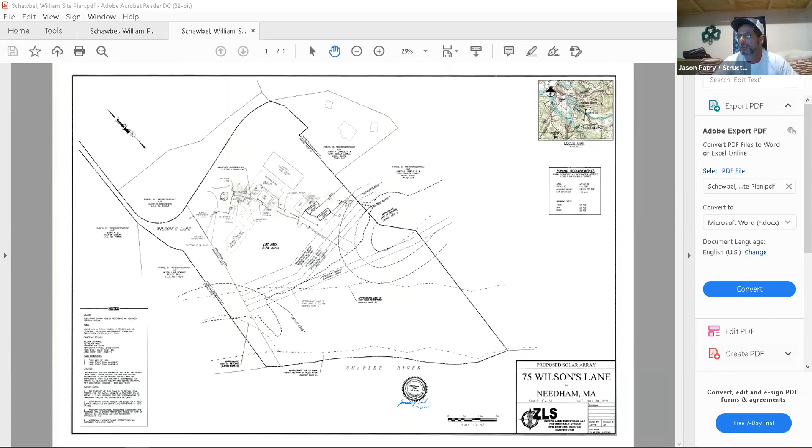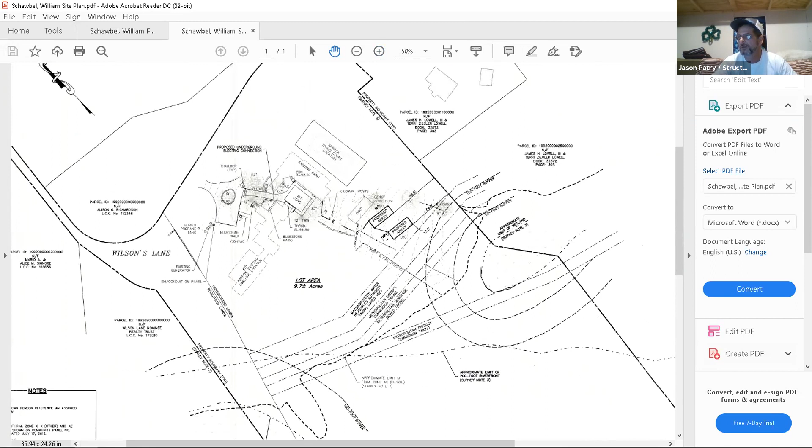There are to be two arrays placed right here with the bolded squares there, looking at about 84 feet off of the property line, and probably ballpark 130 plus feet from the wetland limit back here, so outside of the 100-foot buffer zone. So you're outside of the buffer zone.

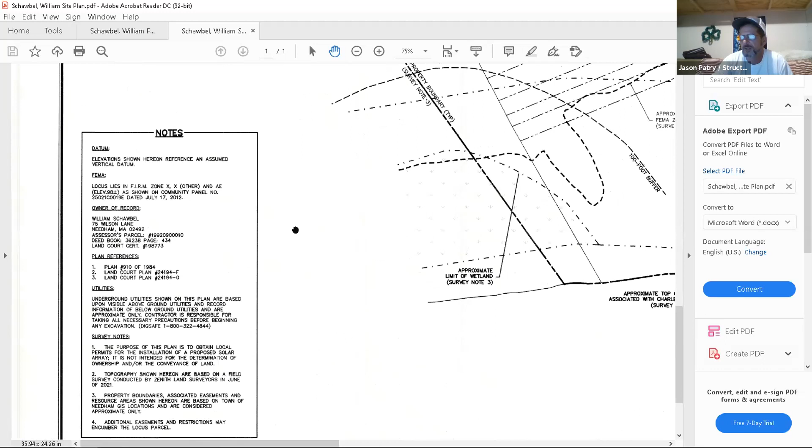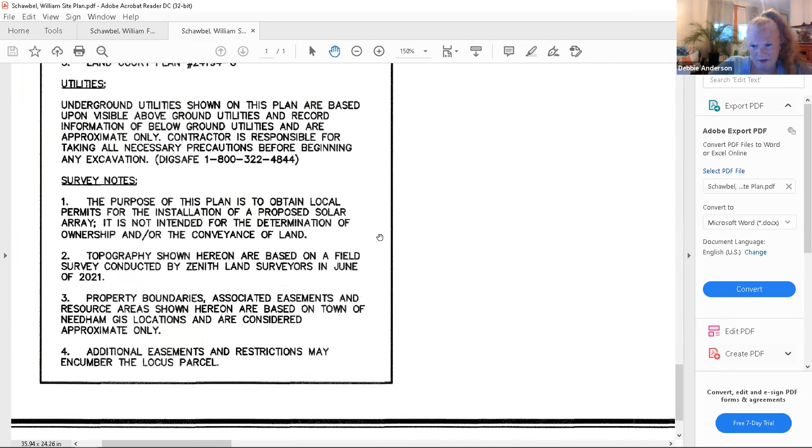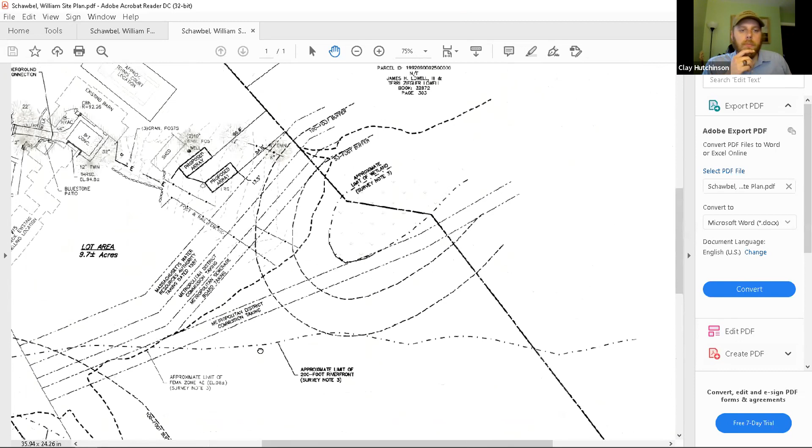So what is triggering you to come in front of us if you're outside of the buffer zone? Not entirely sure, there's more questions here, some notes: additional easements and restrictions may encumber the locus parcel. I'm not sure, I think Clay could probably clarify. Yeah, so there is a small intermittent stream that runs from a wetland on the other side of Wilson down to that ponded wetland just below where the solar arrays are proposed.

Is that not marked here? Is that not marked on these plans? No, I don't see them. And I wasn't sure when we had first spoken, when you were speccing out this project, it was unclear whether there was something there based on the aerials. I was out at the site today, and it runs maybe 3 feet off the property line.

It's not real close to where the solar arrays are going. And the reasoning for the RDA was that if this stream existed, which it does, it's within a mowed field, an area that isn't quite lawn but is a managed, essentially agricultural area, and it's more than 75 feet from the edge of that.

And there's a substantial vegetative buffer that's remaining in place between the solar arrays and that stream that outlets there at the pond below. So you see no trouble?

Within our jurisdiction, or 100 feet from any of the wetlands - it's an intermittent stream. It does not show up on USGS. The stream stats show it as about a 0.10 square mile watershed, so it doesn't meet any of the perennial standards.

So you're not taking down any trees or doing any grading. You're putting up these proposed solar arrays outside of our jurisdiction. Is that true? True. Okay. So it doesn't look like you're really within our jurisdiction.

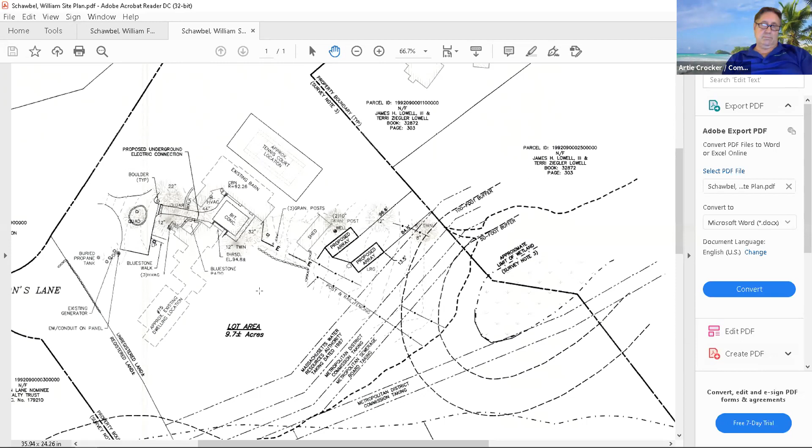So, if nobody has any more questions, I will take a motion. So moved. A motion to issue a negative determination. So moved.

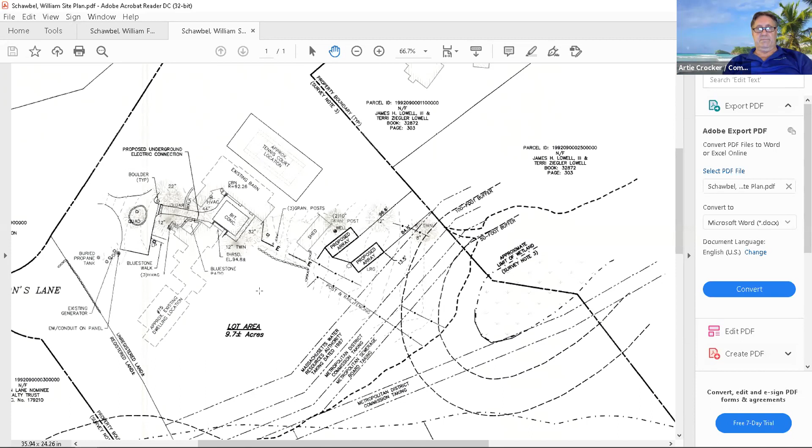That's a first and a second, I think, qualifying it that way. Okay, all in favor? Artie, aye. Bill, aye. Peter, aye. Stephen, aye. Sue, aye. Janet, aye. Allison has recused herself.

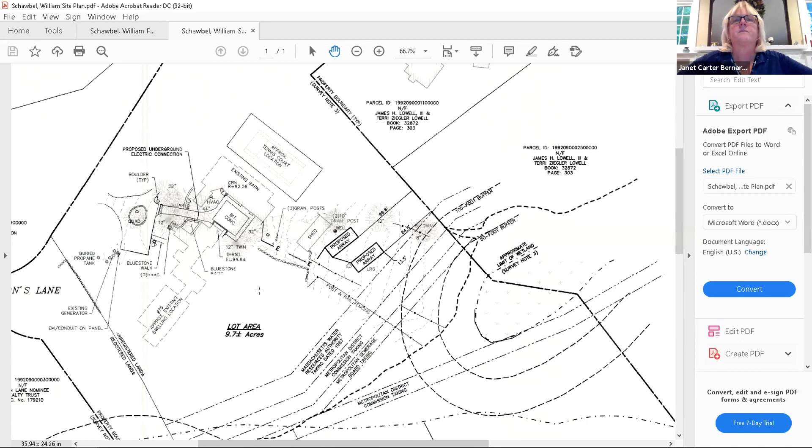Okay, great. Thank you very much for coming, and we appreciate your due diligence in presenting this project to us. Thank you guys.

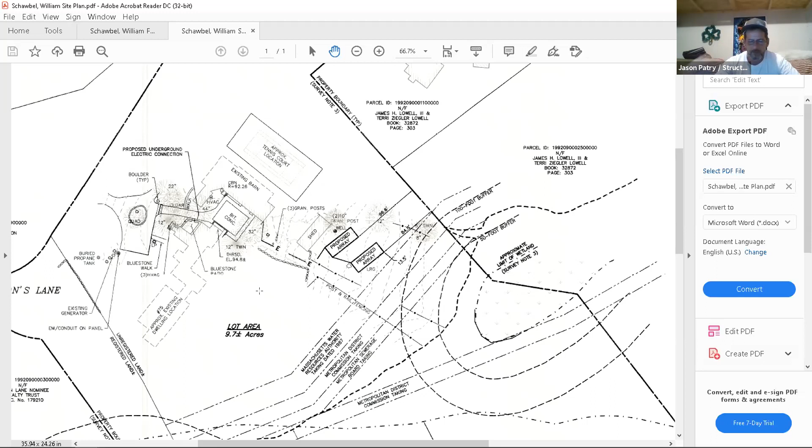Do you have any questions? Jason, do you have any questions? Oh, I don't. I thought I was talking over someone there. Nope, you're good. Just wondering if you guys - thank you for your time. I will pass the message on, and I suppose we'll probably end up meeting some of you guys in the future. And thank you, Clay, for your assistance there, thanks so much. All right, good night. Good night, guys. Thank you.

Okay, next project on the agenda is a continued notice of intent for 83 Rolling Lane, DEP file number 234870. They were presented in front of us 2 weeks ago on August 12th. My understanding is you were waiting to go to ZBA.

Rolling Lane, we should have Scott Henderson. Is Scott Henderson here? Can you hear us? I can. And do you have anybody with you? I don't think the applicant's here.

We corresponded with Clay, and he mentioned that we didn't really have to be here tonight, but I figured I'd log in just for the sake of an appearance.

But we were approved by ZBA and Design Review Board, so it looks like all of our permits are in order, and there were no changes to the site plan as a result of the ZBA application. So what's in front of the commission now is final.

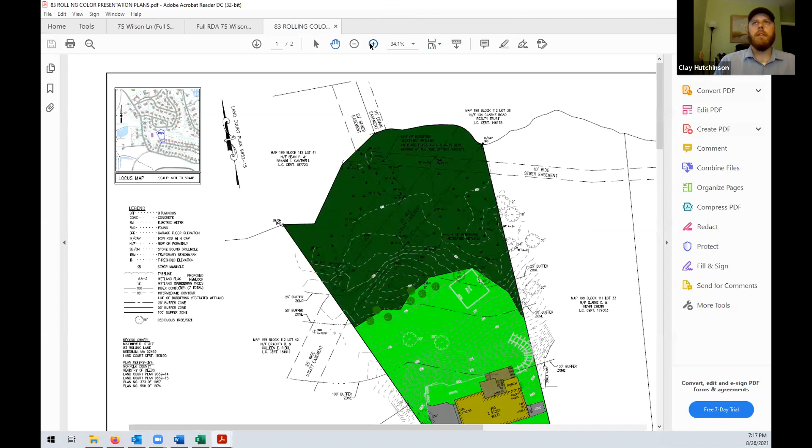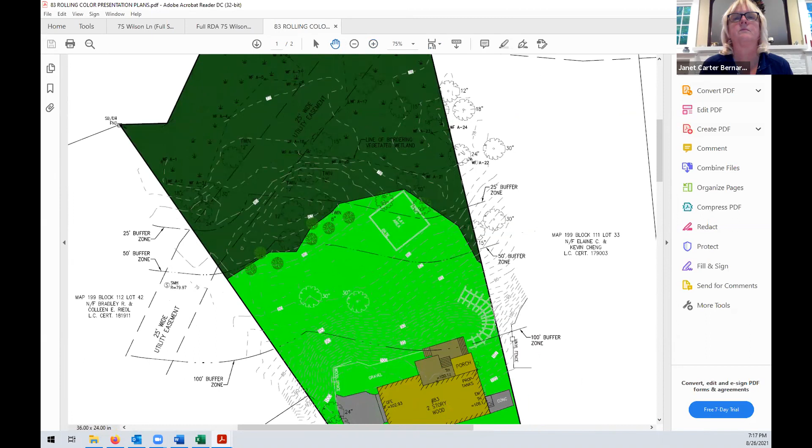So Clay, could you bring up that plan real quick? Yep, just a moment. This is the existing conditions. Is this everything? This is the existing. There should be a proposed too. Second sheet on this PDF, Clay. There we go. Here we go.

There you go. So in the back right corner, there's an existing play area that we're removing from the 25-foot no-disturb zone and planting 2 new deciduous canopy trees in that area to revegetate it.

We're also putting up 7 screening evergreen trees in the back. We've called them out as hemlocks, but I think we'll go with spruce, because you don't have to spray. The 2 that are coming down are pretty far up the existing slope, and they're well within the limit of the 2 terraces.

So there's no way we could save those. They're kind of 2 lone trees. Where that lawn label is in the upper tier, just north of that is where those are located.

So those are 2 trees that are coming out. It's unavoidable, really, just because of the nature of the grading program.

So you went to ZBA because of the walls? Yeah, on the right-hand side, certain portions of the walls exceed 4 feet in height within the side yard setback. And that's a special permit issued by ZBA with a review by the Design Review Board for their aesthetic.

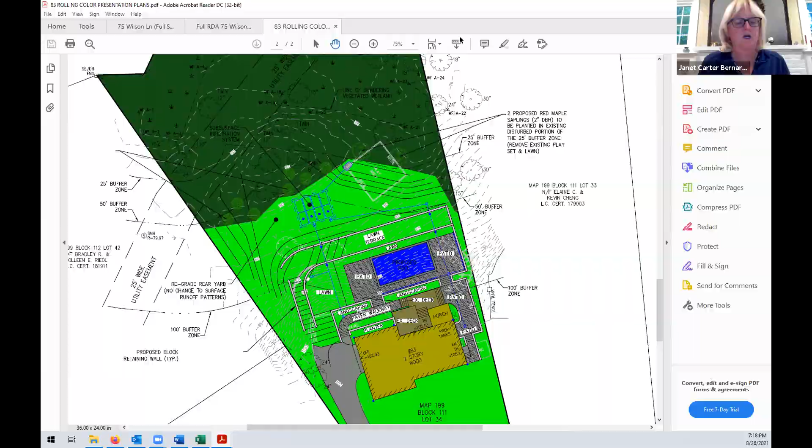Great. Okay, anybody on the board have any questions or comments? Allison? No. Artie? No, I think that was a no. Bill? No. Peter? No comments. Stephen? No comment. Sue? No comment.

Anybody in the audience have any questions or comments regarding this project at 83 Rolling Lane? No hands. Okay, so if we have all the information we need, I will take a motion to close the public hearing. I move that we close the hearing for 83 Rolling Lane.

Second, thank you. Okay, all in favor? Stephen? Aye. Peter? Aye. Allison? Aye. Bill? Aye. Artie? Aye. Sue? Aye. Great.

Thank you very much, the hearing is closed. We will discuss an order of conditions later on in the evening.

You can stay on or you can. I'll probably log off, so I'll be in touch, Debbie and Clay. Thank you. Thanks very much, appreciate your time.

Thank you. Okay, we're going to go to 68 Wilshire Park, DEP file number 234873. This is a continued notice of intent. Okay, well done, Wilshire Park.

Wilshire Park, we have Susan McArthur. Yes, oh hi, McArthur, I'm sorry, I say it wrong every time. Adam Pace. Hi, I'm on here as well. And is Connor here as well? No, I don't think he's on tonight. Okay, so you can hear us and we can hear you.

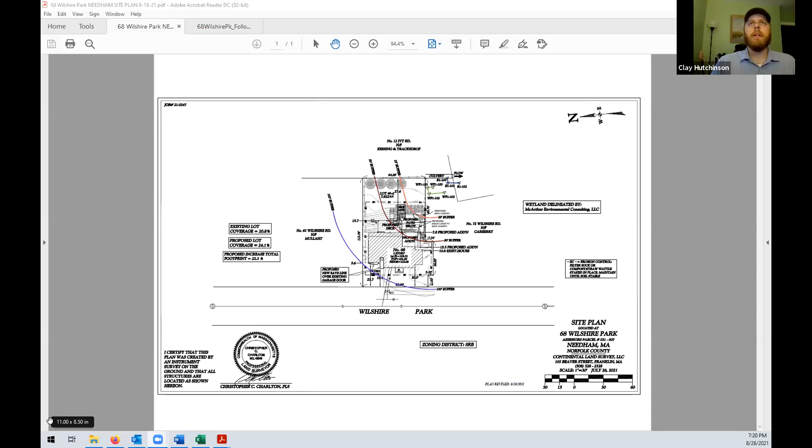Great, so could you, one of you want to do a presentation? Is Clay going to bring something up or are you going to bring something up? I can, or Clay, if you have the plan that I sent you, you could bring that up. I will get it up. Thank you. There we go, you can zoom in on a little bit.

So hi, I'm Susan McArthur and I'm here with Adam Pace, the homeowner applicant. And I'll just kind of recap some of the items that the commission had concerns about and that we've addressed.

So the commission at the last hearing had concerns about the dry wells being sized properly. And we understood coming out of that hearing that the commission was willing to entertain the installation of a rain garden below, I don't know if you can point to it Clay, but on that lower tier, yeah right there. That lower planting tier, which is partially within the 25-foot buffer zone, and direct the stormwater from the proposed addition to that rain garden.

Rather than put in a dry well. And the proposed patio is also going to be pavers, which will be on top of crushed stone. So that will also infiltrate.

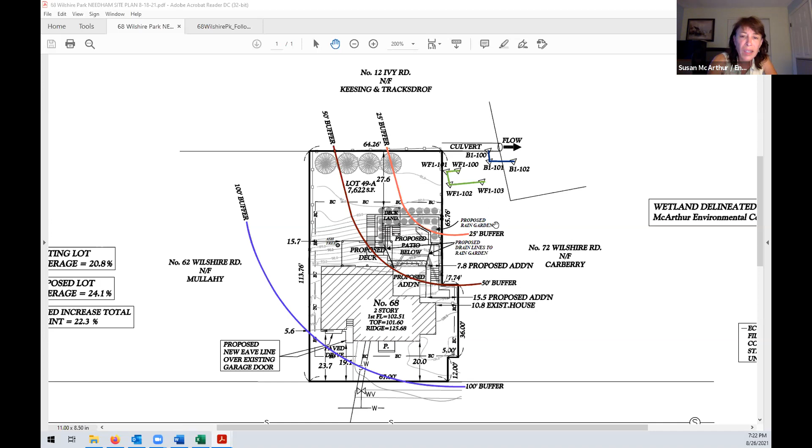And so I don't know if you can kind of see, but we just put some lines coming off of the proposed addition. So there'll be, okay, so yeah, right there, as Clay is pointing to. So there'll be downspouts off of the new addition and they will then be piped to the rain garden.

And I also had included a planting list for the rain garden species, suggested plants. I pulled those from, actually I don't know if, yeah Clay, if you can scroll down to, yeah there's the plants, and then scroll down one more page. So I got them from the Native Plants of New England Rain Gardens, published by UNH.

So there's multiple species in there, and you know, I pulled some and suggested some. Those species may change, but you know, they can be taken off of this list. All suitable for New England plantings.

So the homeowner understands the rain garden and any maintenance that has to do with that, which is basically similar to landscaping and removing dead vegetation and weeding and that kind of thing, similar to any other landscaping. Correct. And also Connor, who isn't on the hearing tonight, is the landscaper who is going to be well versed in installing rain gardens. And you know, we've already spoken, so he knows what he's doing.

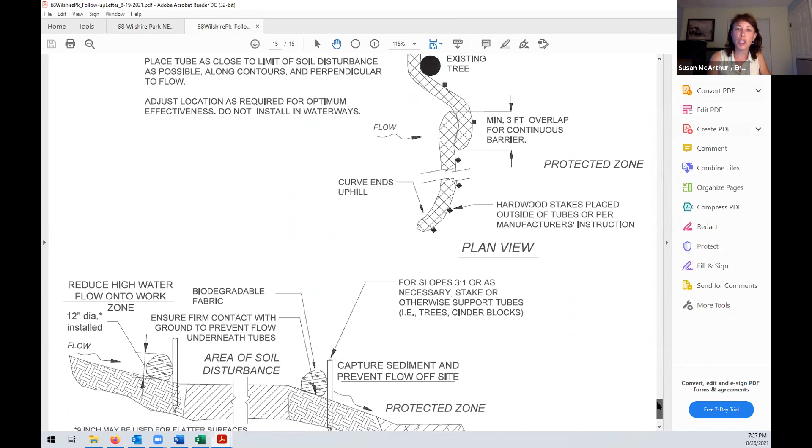And Clay, yeah, if you click on that and go to the last sheet, so you can see at the bottom here, it's got the filter tubes with the silt fence. How are you going to get the equipment down there?

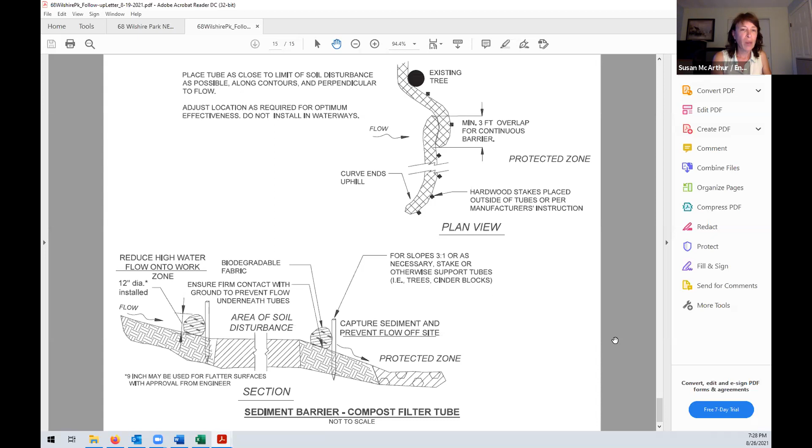Do we have this? Oh, that's next, we're getting to that one. So the next item was somebody asked how are we getting the access to the back. And the plan is, I don't know if I have any photos of that, but Clay, if you go back to the plan on the other sheet.

Okay, so on the right-hand side of the house, there is the existing deck that kind of sticks out. So what they're going to do is take that, remove that deck off of the back of the house, then get the equipment back there, Bobcat or whatever, to do the plantings, the wall, the modular wall, and the planting tiers, and then take the equipment back out, install the addition, the patio, and the deck, is how they tell me that's going to happen.

Yeah, so just to reiterate, where you see proposed addition right now, that's exactly the footprint of our existing deck. So that's all coming down, and the contractor and the landscaper have been coordinating to basically, once they demolish the deck, bring their small Bobcat back there and do exactly what Susan was saying, but not actually build the patio, just do the modular wall and create the tiers. Then at the end of the addition, they're going to come back and just finish off the patio.

And the four trees in the back, are those new or existing? The four trees in the back property line? Oh, those are proposed. I believe they were red maples that were proposed to be planted back there. It's grass right now, surrounded by a picket fence, right, Adam? Yeah, I don't know if it's considered picket or not, but there's a wood fence back there. Oh, yeah, okay.

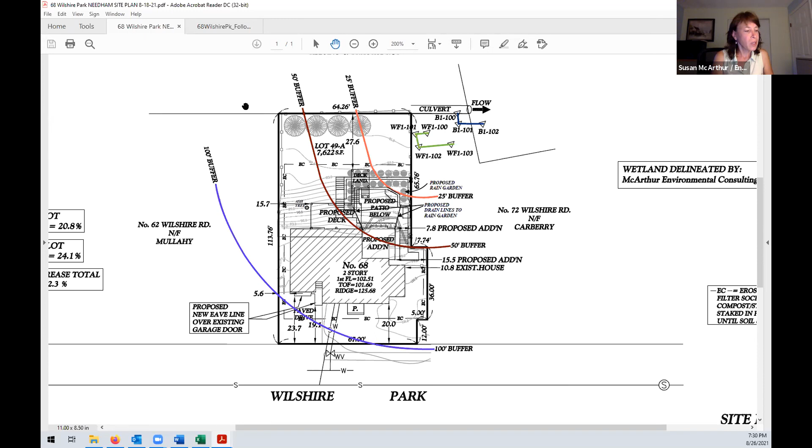And then another item we addressed is the local bylaw fees. Apparently we didn't calculate those correctly, so we've submitted another $100 to cover that cost, and I confirmed that with Debbie. That was submitted with this follow-up information.

As well as the $1,000 request for a waiver fee for working in the 25-foot buffer, which we'd like to request a waiver from the commission, given that we pulled out the patio and the wall is essentially there now. It's not modular, but it's building back up, so we would like to request that waiver.

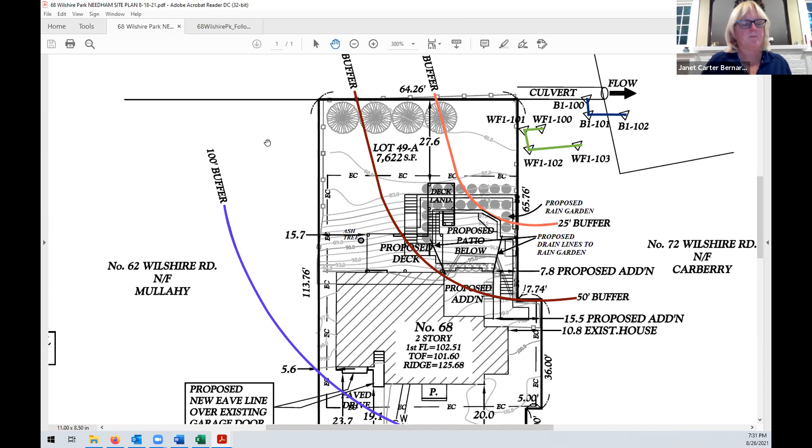Anything else? Oh no, that's all. Okay, I'm going to go to the commission members and see if anybody has any other questions or comments.

I would just like to note that I appreciated you having that list of items that we brought up and your response to them. Thank you, that was very helpful.

Allison? Hi, just two things that might be helpful for rain gardens. I saw that exhaustive list they had there, so you're not going to use all of them, but some of them are really tall. I'm not sure how much lower than the patio, like Joe Pye Weed is like 6 feet tall, so just make sure you have the right height. Some of them get big.

Okay, and the other thing is that rain gardens often are dry. Right, yeah, so some of those plants you quickly went through have to be wet all the time, so make sure they can be dry or wet, or they won't do well. That's all, it's nice you're doing that.

It's great, thank you, thank you. That was good information, Allison. I have Joe Pye Weed in my rain garden, and this year it's finally doing better, but that's because we got all that rain in July. Usually it starts off great and then it looks really sad pretty fast.

Is yours the one they planted at Logan Airport in the middle of not a wet place? No, another company did the hotel one, and it was gigantic. So I think it depends on where it is. Yeah, but in any event, it can be really tall. Okay, can be tall.

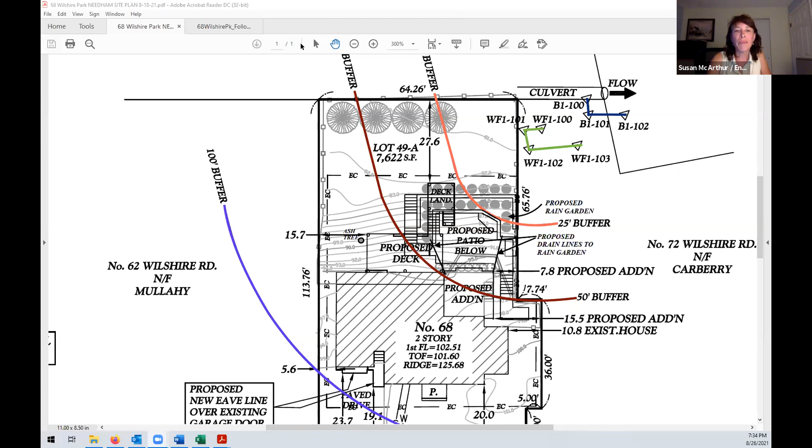No, it's... Clay, can I ask that you put that up again, the wall detail? There's a photo on the next tab over, then just scroll up. So the photo you're going to see is of something similar, sorry it's crooked, but there we go. It's not going to be as tall or anything, and obviously the rain garden isn't going to look as uniform as this, but it was just for visual reference. So it's a modular block wall.

Yeah, but is it lined on the wall side, I guess? So, water's supposed to infiltrate the ground, not through the wall. Right. Connor's not here, so I don't really know, but I'm imagining there will be weep holes in the wall so it doesn't compromise the structure.

Which I think the rain garden will still function with the weep holes down below. Okay. I don't know if anybody else has that concern, that's all.

Does the water just leach out the side of the wall? That's all, I didn't see a detail that showed that water will infiltrate back down.

Right, I mean, I think typically from what I've seen, they do put little weep holes in periodically. Okay, all right, fine. And you definitely want it to have a depression so that it goes into the ground.

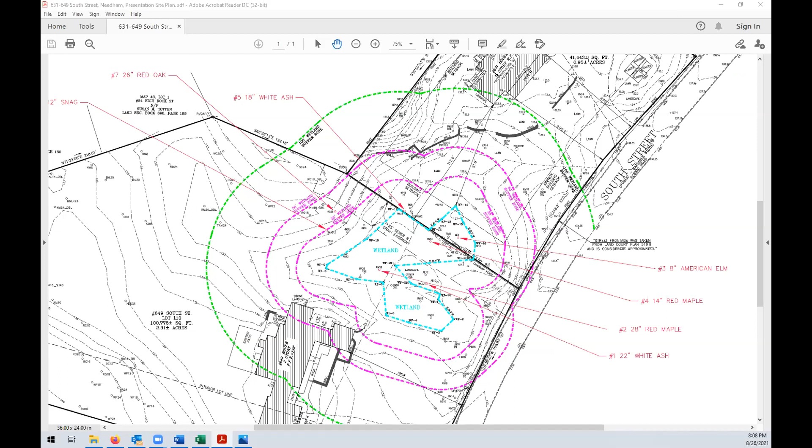Is the tree standing in the wetlands, or is the tree standing outside the wetland? A tree in the wetland, what we're talking about, these 7 trees. I think Sue's going over what DEP's comment was.

I'm not sure how we decide which way a tree is going to fall. I can see the situation. You could, in some instances, figure that out, because if it's leaning 40 degrees, chances are it's going to fall that way. You can in some cases figure it out. I've definitely been in some wetland areas where heavy storms and winds have come through and demolished areas because of all the trees falling. It doesn't look good. Maybe lots of critters can live in those logs, but it certainly does not leave an attractive wetland in the end.

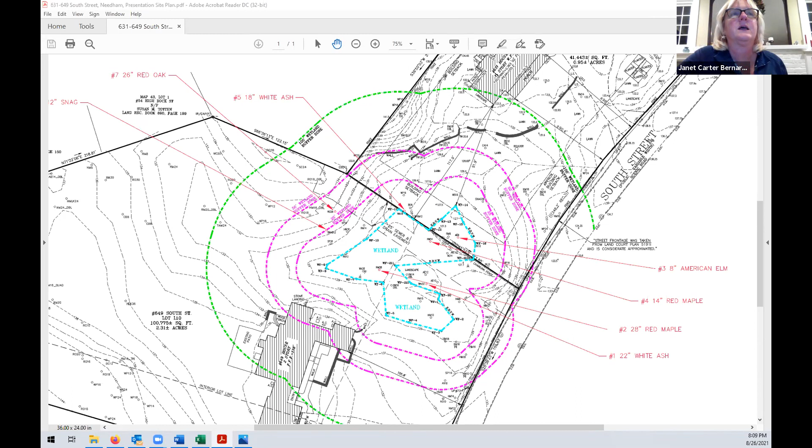I don't know, so I am not sure what to do about this. I guess maybe Clay, if you could take that image down. Thanks.

Can we take just a straw vote on whether this applicant should come back with additional information, or if we feel strongly that we will not allow any of these trees to come down, or any of the trees in the wetlands anyway to come down. Is everybody okay with making an opinion on that?

Stephen? If a tree is going to hit a house, then I'm certainly okay with the tree being dealt with. If it's not, so if they come back and are able to show us that that's a possibility, yeah, if mathematically it actually can hit the house with actual measurements and distances and angles.

So you're willing to hear some more information? If we're being told that something's going to happen with multiple trees, where I don't see, without being 100 feet away from the house, right now I'm not seeing that being the case. Stephen? I think in my mind the applicant has a high bar to get over, but I am willing to listen to any argument they may want to make.

Peter? Yeah, I agree, I'm willing. I think the trees that are likely to fall onto the property in the living space, I'm willing to listen to. The ones that supposedly pose a risk to someone doing a pass-through through an area that's labeled a non-disturb area, I have less interest in hearing.

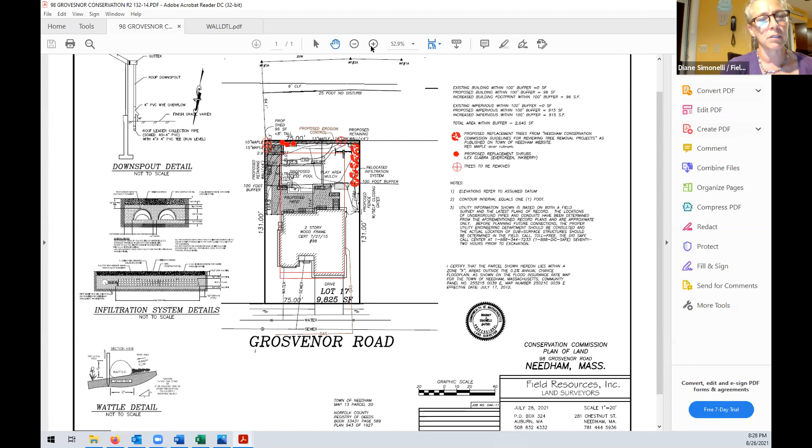All right, Diane, are you going to present this? Yep. Unfortunately I don't have my plan with me this evening, but there were minor changes. We were concerned with one tree, which we did take a look at, and we decided to remove it, and we added a tree and 3 shrubs in its place. So we do have that one other tree coming down on the back part of the property, and again we added another tree to the line on the easterly side there. So we added 1 tree and 3 shrubs to replace the 1 additional tree we were removing.

There was also some questions, and Jared could answer this in regards to the wall. Jared, are you available to speak to that? I think he answered those questions last time anyway, regarding the weep holes. I'm here, Diane, if you can hear. Yep, we can. So the weep holes were not always required, but for this particular type of wall it is required to allow seepage from the inside of the wall. We were waiting for our DEP number, so I believe that was really the bulk of what we needed to speak to this evening.

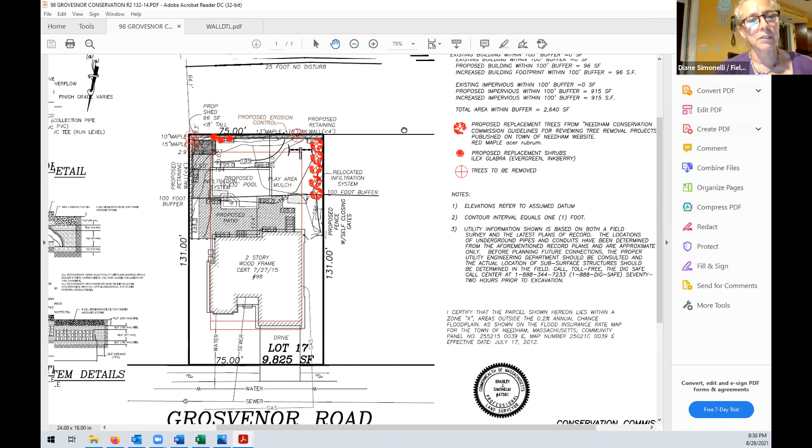Yeah, my notes kind of talked about trees, backwash, and moving the infiltration system, which I think was just what I scribbled down as something being discussed. Right, so the infiltration system is being moved—this house came to you, I believe, 2 years ago, so we're just moving the location outside of the pool.

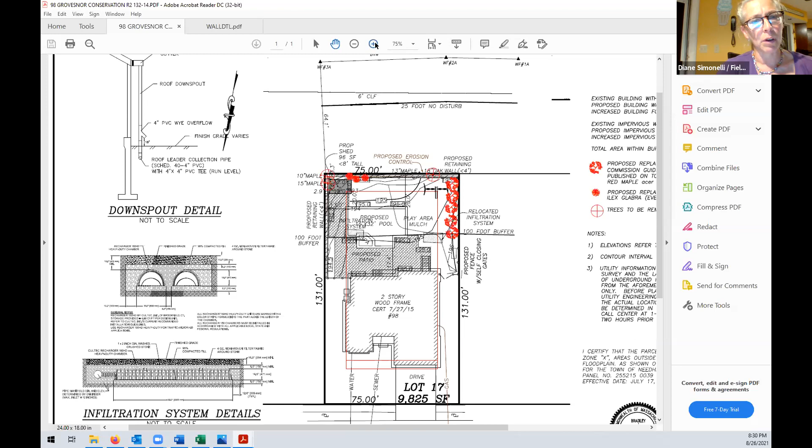Great. Yes, and the backwash—I thought that was on the plan, but I'm not seeing it there. We were going to put a washout behind the shed, but I can't quite see it. It will be highlighted for the final plan prior to releasing the order. We're going to put basically a pit behind the shed that will allow for the backwash from the pool. Bill, does that work for you? Yep, that's fine.

And the wall is less than 4 feet tall, but that one tree you felt like you couldn't save—the 13-inch maple you are saving because that's not actually on your property. Correct. Be careful not to hurt the roots of that tree. Yes, yep.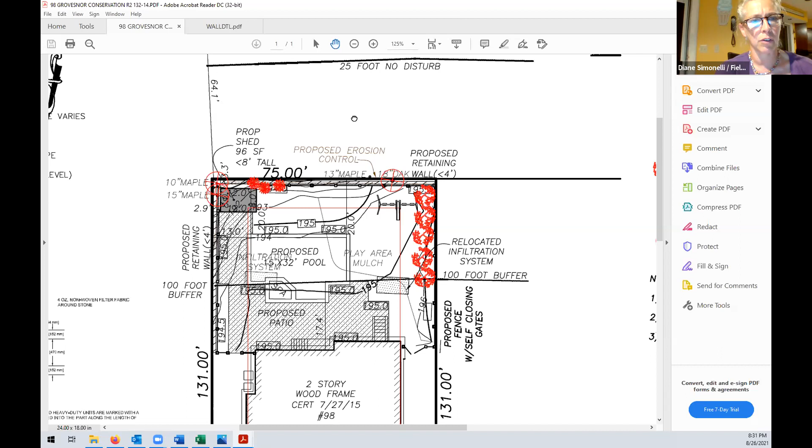And I do have a question. So it looks like that dark line at the property line is basically 50 feet from the wetland—is that true? No. The 25 is up by where his cursor is. Okay, that's 64 feet from what? From the shed. To the wetland? Correct. Okay, so then there's another 40 feet, 35 feet.

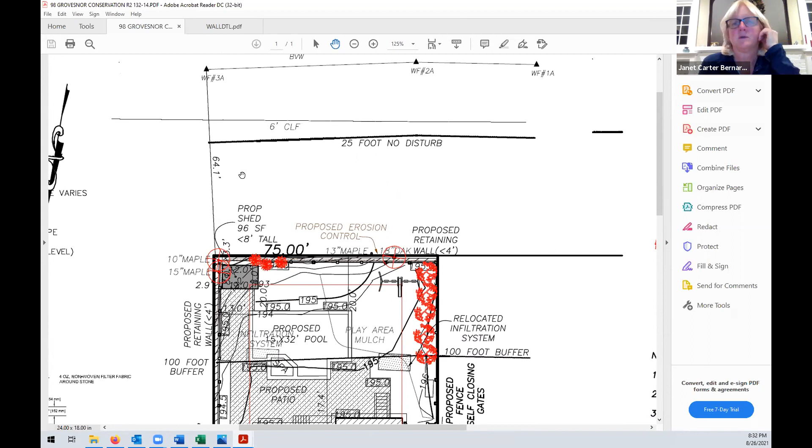I'm looking at those 5 trees, I believe red maples, that you're proposing. So there's 35 feet for 5 trees—Allison, does that work with red maples? Yeah, in 35 feet you can fit 5 trees and they're perfectly fine. The thing is you can plant trees really close together; when they're young they're fine, but in 30 years some will decline. The ones on the ends will get much bigger, and the ones more in the middle won't grow as much. So it's fine.

So you don't have a fine issue. I mean, I would rather stagger them like this, zigzag, not just in a line. Okay, we were a little restricted on the lot because I know you prefer the trees to be replaced within your jurisdiction. So as you can see with the pool and the play area, it did kind of restrict us a little bit. I'm just saying stagger it a little bit, give them a little bit more space. Okay, just a little.

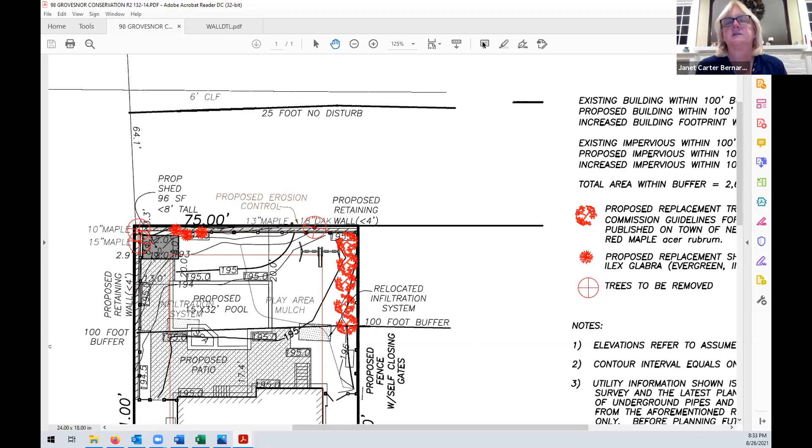Okay, so does any commission members have any other questions regarding this project? Stephen, no comment. Peter, no comment. Artie, no comment. Bill, no comments. Allison, Sue, no comment.

Okay, does anybody in the audience have any comment regarding this project? There is nobody else in the audience.

Okay, thank you for being so patient through all that. I missed you guys trying to do all the easy ones before the harder ones. So if we don't need any more additional information, I will take a motion to close this hearing for 98 Grosvenor, DEP file number 234875. So moved. Second. All in favor?

Sue, aye. Allison, aye. Bill, aye. Artie, aye. Peter, aye. Stephen, aye. Great. Thank you very much for your patience.

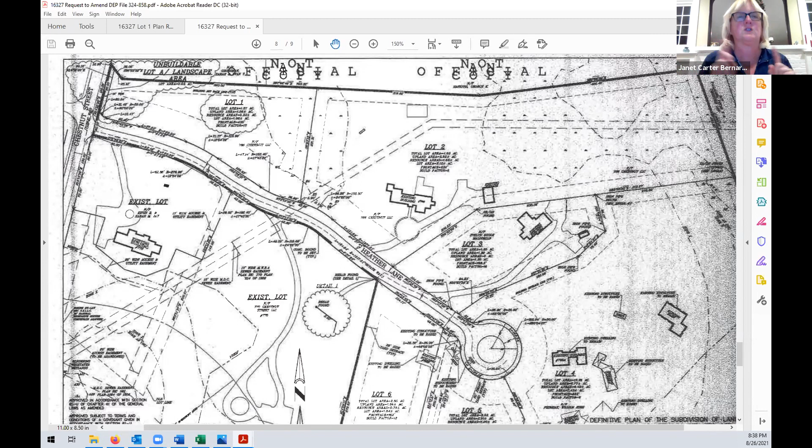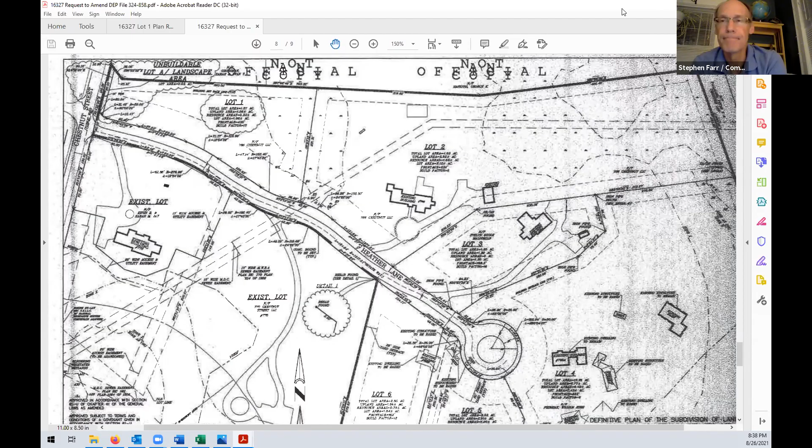So we'll start with anybody in the commission having any questions or concerns about this project. Stephen? No comment. Peter? No comment. Artie? No comment. Bill? No comment. Allison? No comment. Sue? No comment.

Okay, so now I'm looking for a motion to approve the amended order of conditions reflecting the new address and the plan associated with it. So moved.

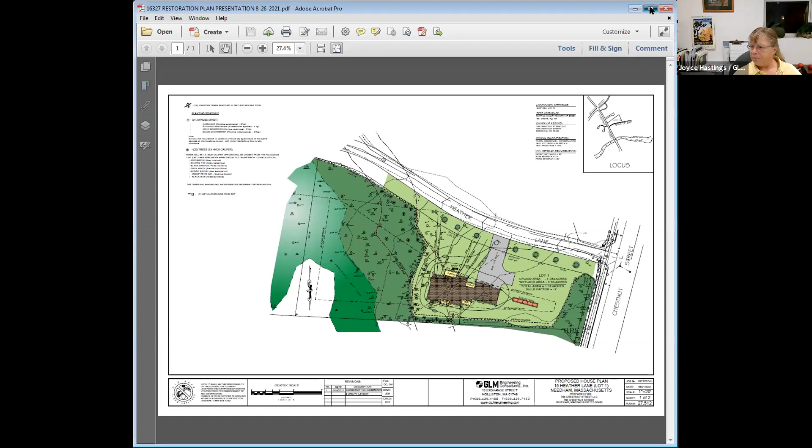And if I may share my screen - yep. This is the colored version of the plan that I submitted. We revised it, as you can see now - before, the way the tie cards were laid out, nothing made sense. And the fact that we went out and located them made all the difference in the world.

Because now our sewer stub is right in front of the property. It, as someone pointed out, would make sense. So we have our gas, our water, our sewer stub. We have two electric connections. The lights out here are all attached to the individual houses, there's no electricity run down the street for the lighting. So there are individual connections for both the light and the house itself, and then cable and TV come in the front.

So it worked out that I have moved my erosion control barrier out to around the toe of slope, around the 110 and then out the 100. And moved the plantings around, some to add buffering along the property line in this area here, and then brought it out along the limits. The trees out here are - it's not thickly forested, not thickly wooded - so I put the trees kind of in and around the edges so that they can still capture enough light along with the shrubs. The shrubs, the goal would be that it forms another barrier like the edges have done of the woods now.

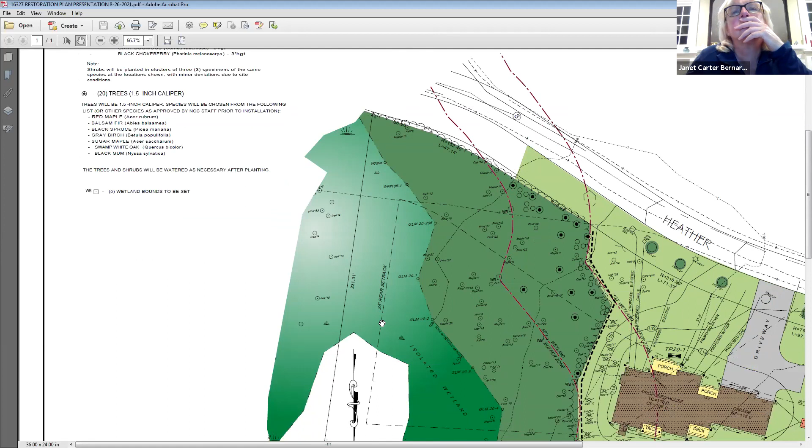And what happened to those big oak trees? Did they not make it? I worked around the trees here. I basically came out around the trees that were sitting here, the oak trees. Did the oak trees survive or not? Yes, I pulled the line out around the trees so that all the oaks that were clustered at the top are all protected.

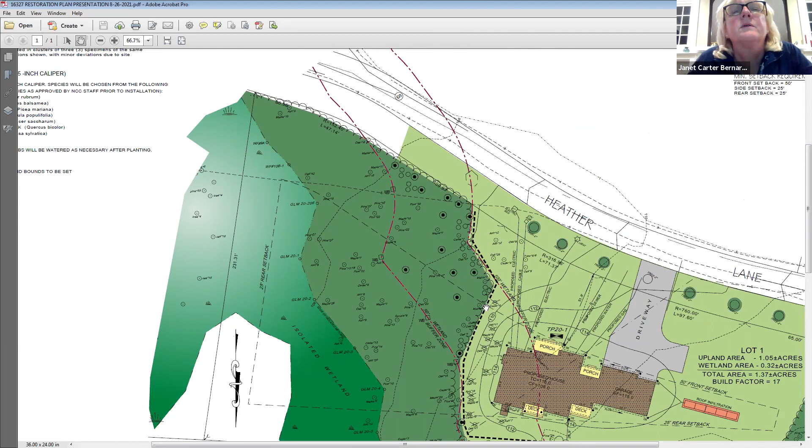Okay, I feel better about that. Because the other trees are smaller. There is, I think, one larger one in there. I have 11s, 10, 6. There's one 21 inch in the back. I did actually stop by this site also, and I saw that sewer where we thought it was.

I think... who did I bump into? Maybe Billy Piersack or something.

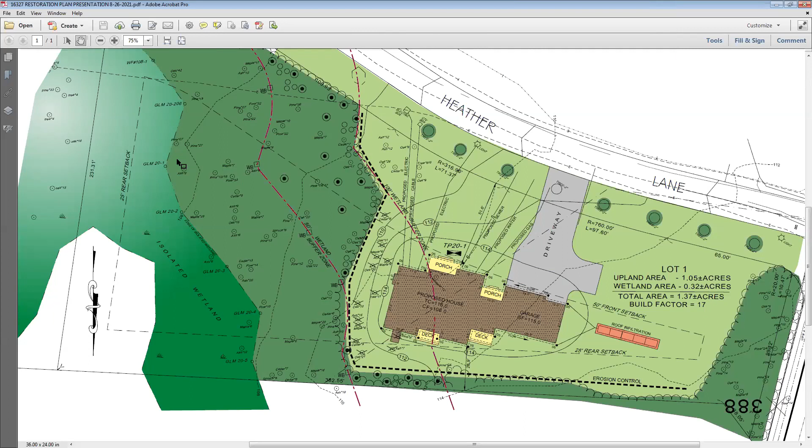So I appreciate that you went back and are now saving some of those trees. Well, I think it would have been helpful if I had done that before. With tie cards, you usually think you've got them, but it's how you interpret them, I guess. But there's still quite a few trees coming down within our buffer zone. They are pretty close to the house, and they are outside the 50-foot.

Commission members, I'll let people have their opinion. Peter? Yeah, I'm much happier with this plan. Bill? No further comments. Allison? You might be on mute if you're talking. Did it go off? Oh, good. It's okay. Sue? No comment. Artie? The only really question I have is really pertaining to the big oaks that were being left near the,

let's call it the grass line. I mean, those trees probably have a pretty big canopy. So what is the health of those trees? How is that going to be affected by how that lawn's being dealt with? That is my question. So there isn't any grading going up to within, it's almost 20 plus feet away from the tree.

So we can do this. Could we have that back up here on the screen? Sure, yep, wherever that came down for. Absolutely, hold on one second. So there's these. So we could do... we could also do the tree protection around these here. Yep, I think that would be helpful. We have the barrier out here and it's probably... but the toe of slope is in this area here, so it's possible that we can certainly do tree protection around these to further protect them along with.

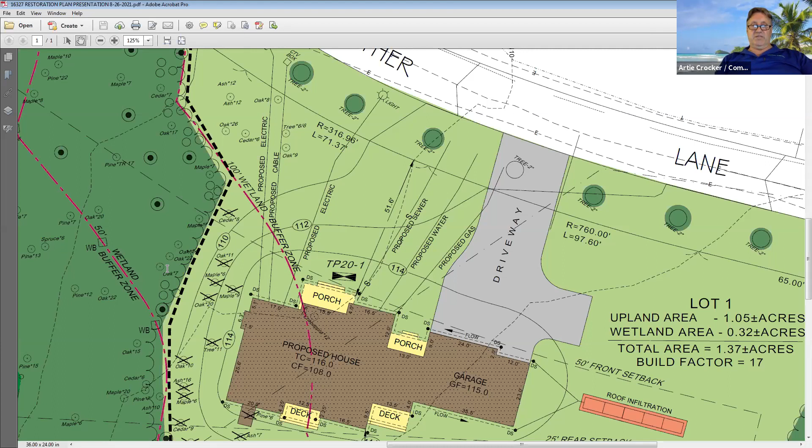I mean, I know the drip line from the canopy of a tree is greatly related to the health of the tree. So I'm just making the comment that if there's grass being planted, there's work being done, there's equipment being moved, we've had issues before with the roots, the health of the tree, when we're starting to all of a sudden get close to the tree itself. I'm just raising that up, I just want to make certain the tree is protected, the health of the tree. So, yeah, I agree with you on that, Artie. So this

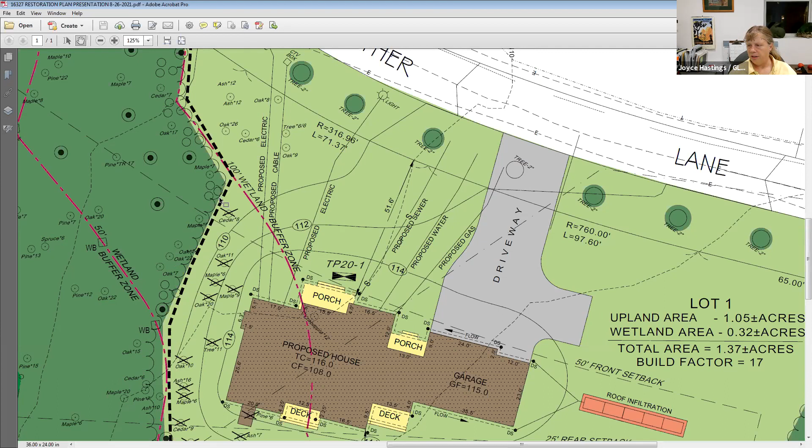dashed black line you have, I believe that's some kind of erosion barrier, what does that look like? It's a filter mitt. So could you add maybe like that orange construction fencing along there? You don't have a lot of space between that line, you probably aren't going to grade up to those trees, maybe they're 5 feet away from that line. But you don't want any equipment to back into them. So if we put, just to protect this edge, the orange construction fence in this area around the end of the house, like this here?

To protect any trees that you're trying to protect, it needs to be very visible so you don't have equipment backing into them. Tree protection is healthy, making sure the roots don't get pounded down with equipment driving over them. I think you can do that with this grading plan, coming up with a way to protect all the trees you're planning to protect.

I think a construction fence would be okay. You might want to put boards around it if you think the trucks are getting close, but they shouldn't be going that close to the tree. Not that close, yeah, we should be okay. But the little maple, that's pretty close.

The good thing is that this is fill, not taking away. So if they can minimize the fill as they get toward that edge, maybe make it a bit steeper, that's much better than cutting, because when you cut you actually cut the roots. This is more about suffocating the roots. The rule of thumb is if you have more than 4 to 6 inches of fill, you can put a little sand under it and then the loam, just so a bit more air can get to the roots. It's suffocating the roots that's the issue.

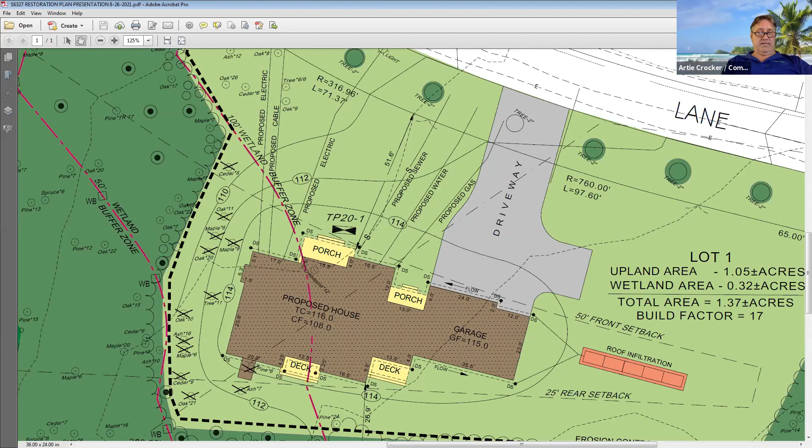I feel like I didn't get everybody. Maybe Stephen? Yeah, no comments. All right, there's still a lot of trees, but I guess this is where we're at. So are we satisfied with everything else about this? Deb or Clay, do you have any other comments about this project?

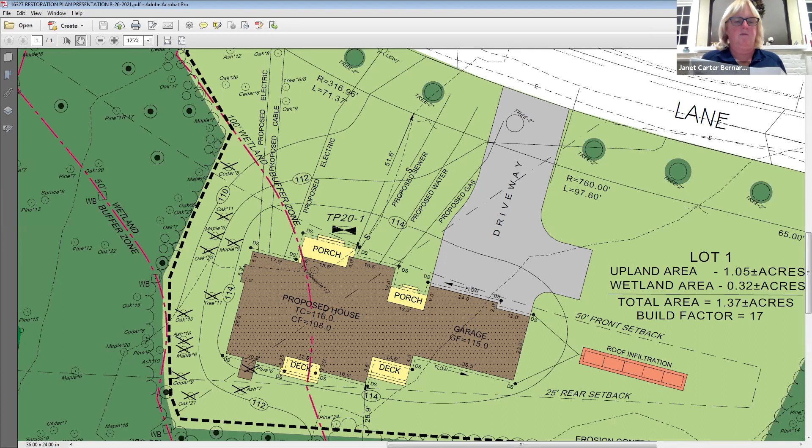No. So you're happy with the ratio of trees coming out to trees going in, making up for it with shrubs? Yeah, we've allowed that before. Okay, so what was the final count? There's 13 trees coming out - I think 20. Yeah, so there's 24 shrubs and 20 trees.

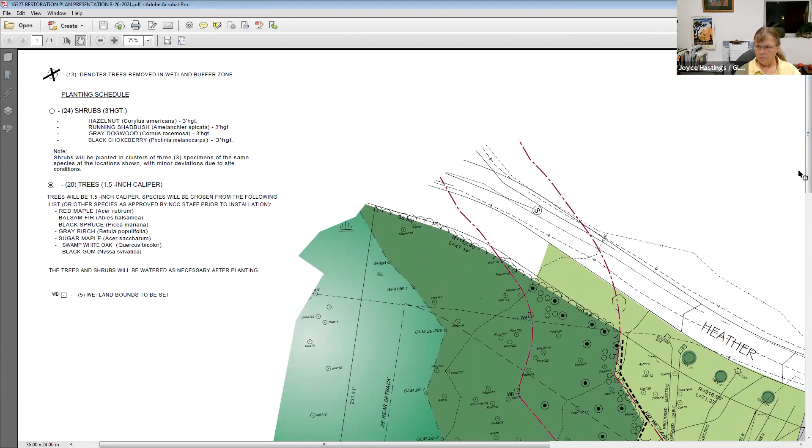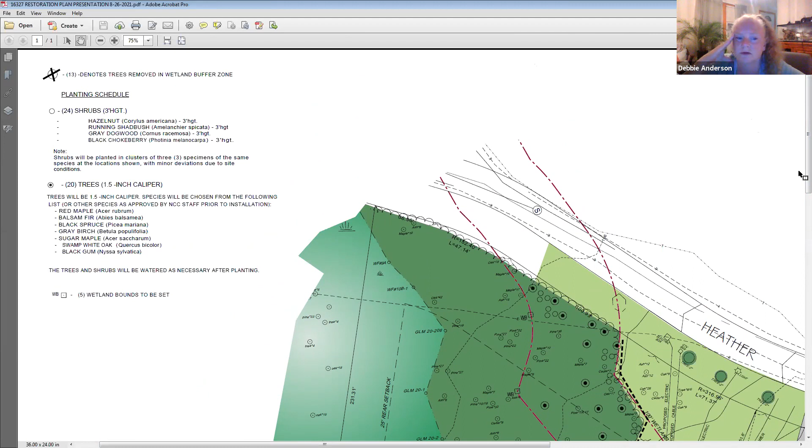So that's 4 shrubs, instead of the 6 trees. There's 24 shrubs now.

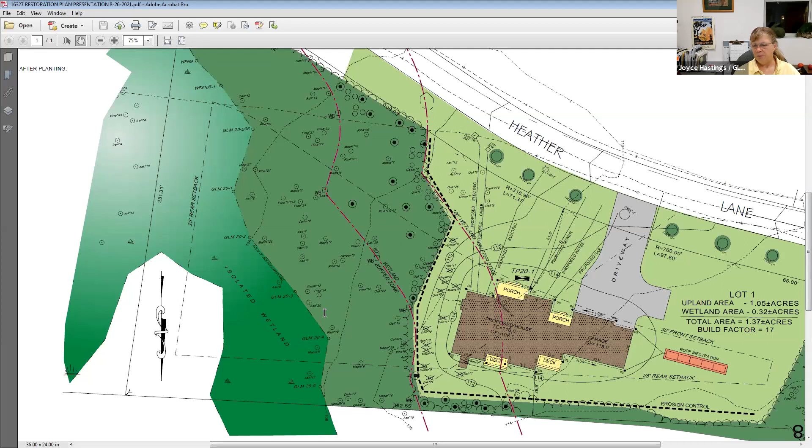One of the other questions I had was that I had run my wetland bounds along the 50-foot. Did you want them at the limit of work? You mean the monument, with the plaque? I think at the 50-foot works for me, I don't need them elsewhere. I don't know if anybody else has an opinion, but I have no problem at the 50-foot. Frequently we actually put them at the 25-foot, but this is a thick wooded area, so the 50-foot seems appropriate. Does anybody have an opinion on that? Monuments going at the 50-foot buffer.

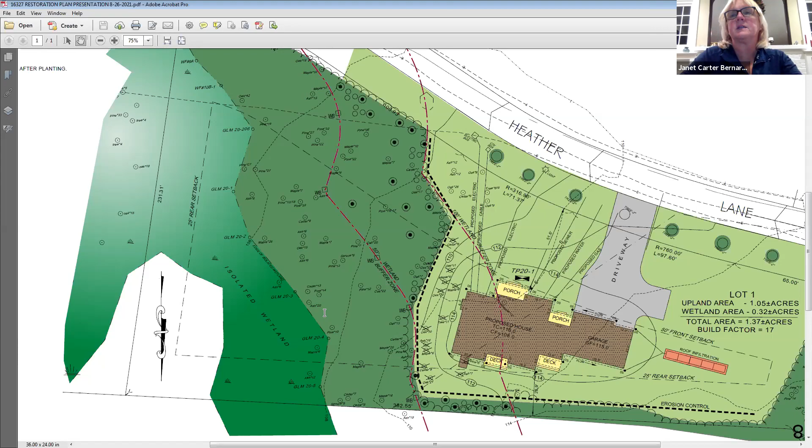Okay, any other questions from the commission, or is there anybody in the audience that has any questions? Nobody's in the audience. I'm sorry for 122 Richardson Drive that you have to wait so long.

Okay, so if we are happy, we are ready to close this hearing. We may not be happy because we have 13 trees coming out, but we're getting 20 trees and 24 shrubs, and we were told exactly where they were going to be. Okay, I didn't see it. Oh yeah, where the new trees and shrubs are going to be. Yeah, they use dots all over the plan. Okay, I saw something but couldn't tell.

Okay, I'm good. Move that we close the hearing for 15 Heather Lane. Second. All in favor? Allison, aye. Sue, aye. Peter, aye. Bill, aye. Artie, aye. Stephen, aye. Great, thank you very much. Thank you very much, good night, have a good night.

Okay, so we have one more item that is on other business. I believe it's 122 Richardson Drive, DEP file number 234784, discussion on restoration plantings.

The applicant is here, is it the applicant homeowner? Can you hear us? Yes, I can. This is Ashraf Sloan. You're on my list. And how do you pronounce your last name? Halimadine. Halimadine, nice, okay.

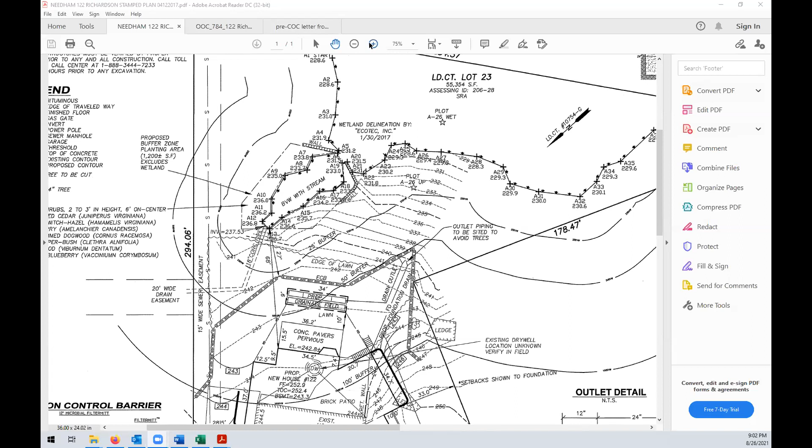Thinking about why that was done, we had a plan from April, I guess that was the plan we initially brought to the committee in April, and then we had a revised plan in May. I bet that was the plan that was on my computer, and since I have so many documents, that's what I gave to my landscaper.

So he pointed out that the plants aren't exactly where they were supposed to be planted, but they are living and doing okay. So I was reaching out to the commission over several months to try to figure out and get some direction on what needs to be done. Is this okay? In addition, we had also talked about giving up some lawn area, which was already there, like 8 to 10 feet, which was not carved out, which was not given up.

And so Clay kindly came out earlier this month and looked at everything.

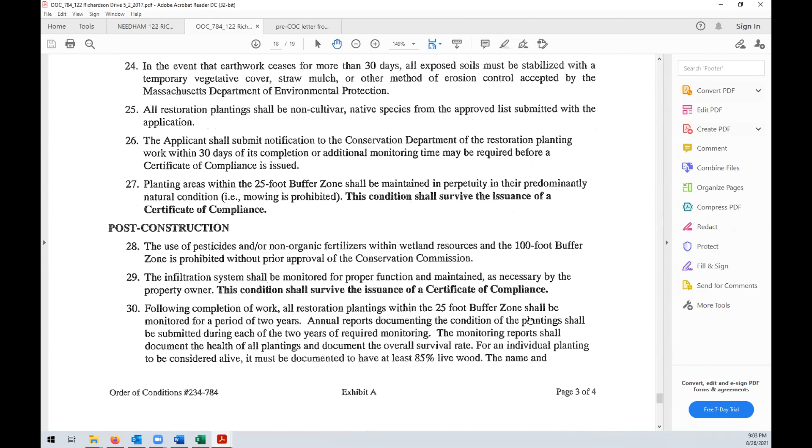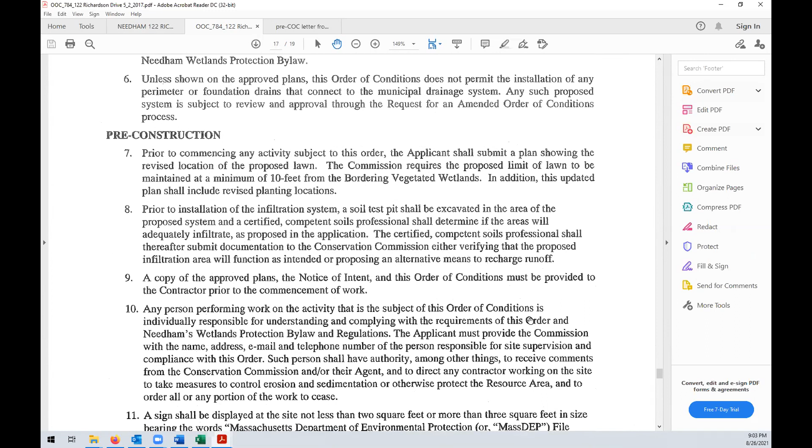There's been kind of good naturalization around the plants. You can't really see the plants that well because there's everything else growing around them. But there is Asiatic bittersweet, which is rampant throughout. There's a tree, I'm not sure exactly what kind, about 5 or 6 feet away from the pipe that discharges all the water, and it's filled with Asiatic bittersweet, as is all the vegetation. There's even a tree between my house and my sister's house, who's my neighbor, probably about 20 or so feet away, and you can see it's coursing its way up through that too.

So we wanted to have a discussion about what you guys would like us to do. Do you want that lawn area given up? Is there any way we could just deal with this—I can get a professional to handle the Asiatic bittersweet if it's really going to take down all these 33 plants I've planted, as well as these trees and all the other nice vegetation, the nice wetlands. I just wanted some direction before we do anything else, and work on an as-built and all of that too.

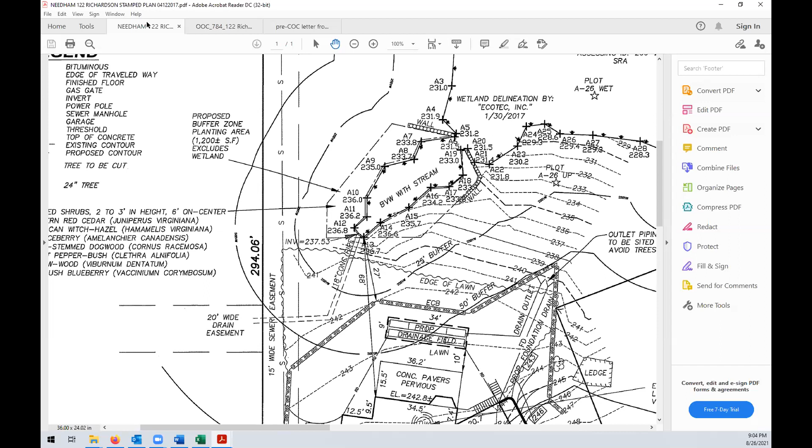Well, managing the bittersweet is definitely something we need to address. Clay, did you have something to add to this?

Yeah, so I met out there with Ashraf, and I apologize—the plan of record, the plan on the screen right now, was the original application plan. As noted, there was a revision that was contingent on receiving the order of conditions. When this was originally approved, the plantings were going to go along this side of the BVW, above this headwall and back. The commission requested that the lawn area be maintained at a minimum of 10 feet from the edge of the wetland, giving up something like 4 to 6 feet of lawn area back here. The proposed plantings were pushed more toward the front to reestablish a bit more buffer where this outlet pipe is. As Ashraf mentioned, when we were out there we identified that the plantings went in according to the original plan rather than the final revision.

So as they're looking now to close out, the question is, rather than making them replant everything—since the planting list was fairly extensive with quite a few plantings, and they're essentially in, with the lawn still at its original limit—it didn't make sense to have him replant or transplant everything to the forefront, especially since a lot of them have taken very nicely back here. Instead, we wanted to get an idea from the commission as to what the remedy would be to correct this as they get ready to close out the COC and work with John Rockwood on monitoring those plantings.

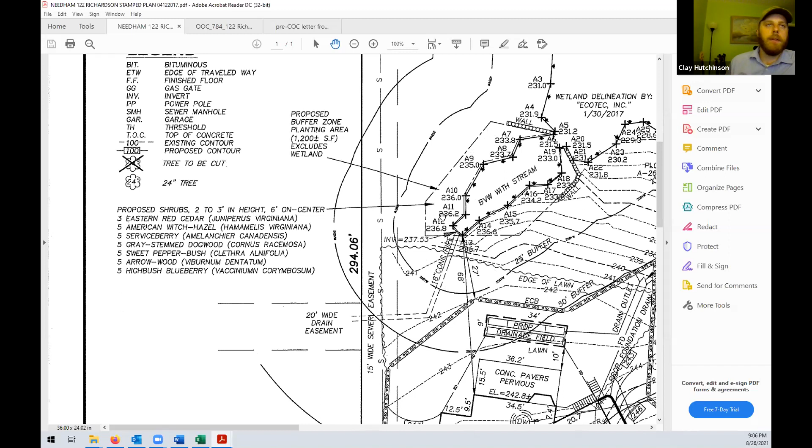Does there need to be a correction? The plants are healthy and they're in the ground. I certainly don't think we need them to move those plants that have been planted. There might be something as far as giving up some of that lawn to get further away from the BVW, and maybe adding 2 or 3 additional plants near that 18-inch concrete pipe. But also, what about the bittersweet? Is that something we should focus on a little more? Is there a way for him to manage that better as part of protecting this BVW? Yes, that was one of my recommendations when we met on site—to propose taking care of the bittersweet, because it's currently growing along the edge habitat here and has made its way into the back.

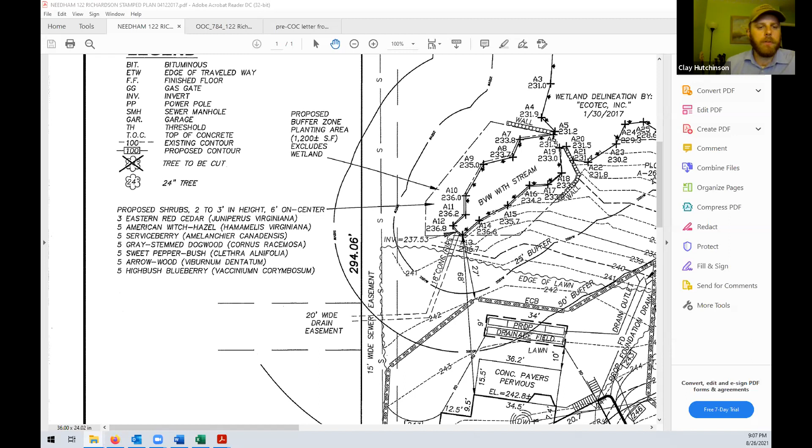It doesn't look like it's impacting the plantings specifically, but let me pull up a couple photos. The area that was meant to be restored has really come in nicely, it's thick. This is where that headwall pops out, right over here. As you can see, there are trees at the limit of lawn as well as an understory, and the bittersweet is just growing rampantly through there. But this is the area that was planted through the back, around the other side of this stand of trees.

So it is grown in nicely. This would be the area essentially from about here across that was originally requested to be relinquished as lawn. But one of the things that we had discussed mentioning to the commission was instead implementing long-term monitoring of the bittersweet, getting rid of it and keeping an eye on it over several years or however long they own the property, to make sure that it doesn't really establish as strongly as it currently is trying to on this edge habitat, and keeping it from establishing both in these trees and further back into the mitigation plantings.

Do we have good direction to provide him, or maybe John Rockwood already has, on how to manage that bittersweet? Well, we were out in the field and I pointed it out to him, and we discussed how to identify it, what it is. My understanding is that it doesn't involve just cutting it down, but rather applying a wetland approved herbicide to the cut down stems.